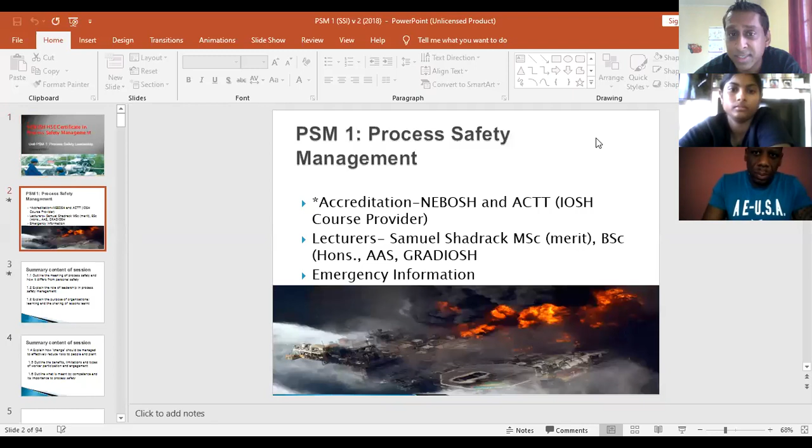Right? So the first lesson, and I'll go very fast with this. Let me just get this on the slideshow. So the first lesson basically had a lot of small topics. Not too sure what that is. Right, so a lot of small topics on the first lesson. Small meaning they were just a couple of slides long.

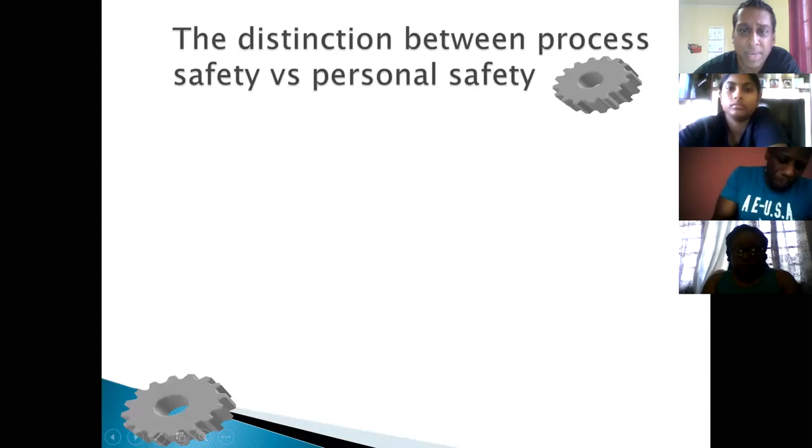And I think the first piece would have been the main distinction between process safety and normal safety. Just to remind you, the main thing was that process safety more pertains to the industries, like the chemical industry, and process safety has to do with those events that don't happen all the time. It's not like normal safety. Normal safety, every day you go to work, you can find something that can trip you, something that can cause slips, trips and falls, or there may be housekeeping issues.

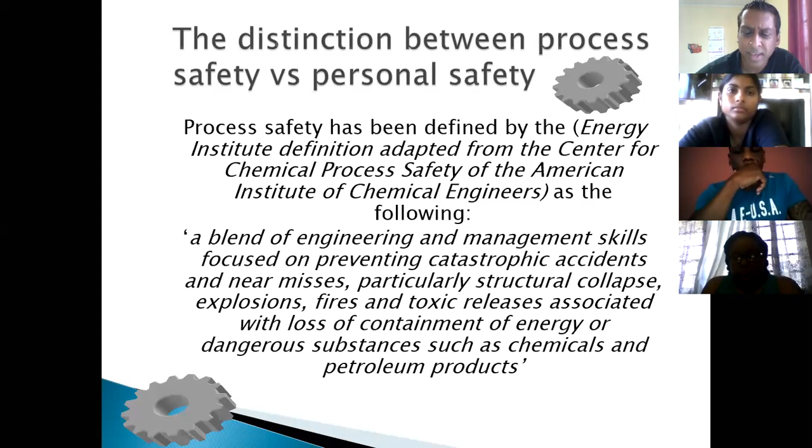But with process safety, the hazards are really stuff that don't happen all the time. They say it is low frequency. But when it does happen, it tends to be more than somebody slipping, tripping and falling. In fact, the outcome is oftentimes death and destruction on a multiple scale. So process safety, and of course we had exam questions on these, deals with stuff that doesn't happen all the time, but when it does, the severity is quite high. And of course, I think we all would have seen the explosion in Beirut.

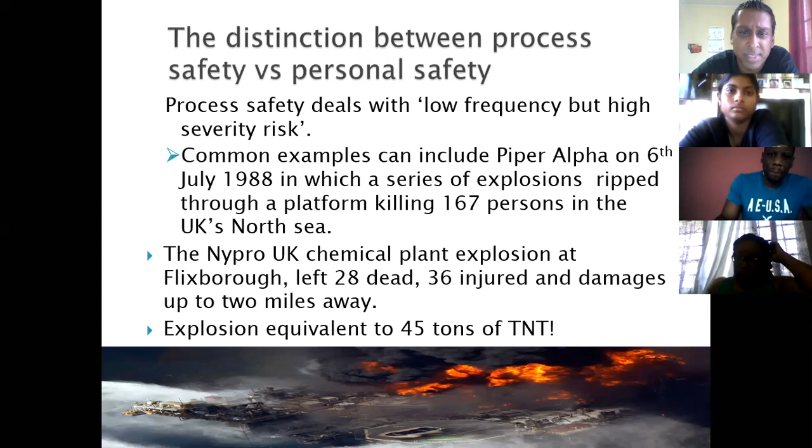Now I do have the video. I don't want to show a video at the start of the class; I prefer to do some teaching. So if I am finished and I have a couple minutes extra, it's about a 7-minute video from CNN, I'll give you a look at it. So that's the idea of process safety, stuff that doesn't happen all the time, but when it does, it tends to be quite disastrous. And this was a question coming out of that anyway.

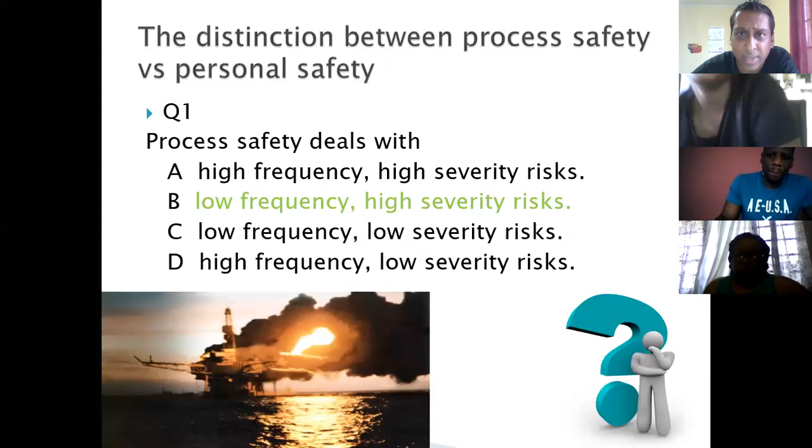You should have maybe pen and paper nearby. Let me see if someone is messaging. Sometimes people don't get the link. If anybody has trouble, you could probably just liaise with Janet behind the scenes. Yeah, like I was saying, if you have pen and paper nearby, we are recording this, and hopefully you have your handout.

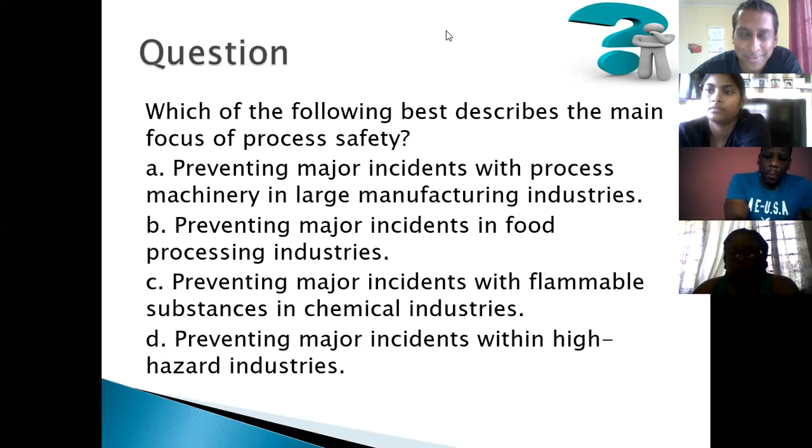And that's the fun thing about multiple choice. For those who forgot, all the answers are looking there at you. Again, if you have that pen and paper nearby, just remember it is 40 questions, and if you get 24 correct, you pass, right? So you have a good amount of questions you can safely get wrong and still be awarded this certificate. So 24 out of the 40 will give you 60%.

And of course, I have not had anybody who scored 60 in this. People have been in the 90s, 80s, sometimes you find the odd 70s, because it is that easy of an exam. Anyway, I'm not gonna go through all of the subheadings, I can show you them. So we had process safety leadership. That basically says the same thing for all safety courses, that leadership starts at the top, right? I'm going to leave that there.

Then we had the management system. This was one, process safety leadership. Does anybody remember where leadership falls in the management cycle? The management cycle goes over the principle known as the Deming cycle, which is the plan, do, check, act model. And this is multiple choice, of course. So where does the leadership fall? Does it fall within plan, do, check, act, or do you remember where we had said that it will go?

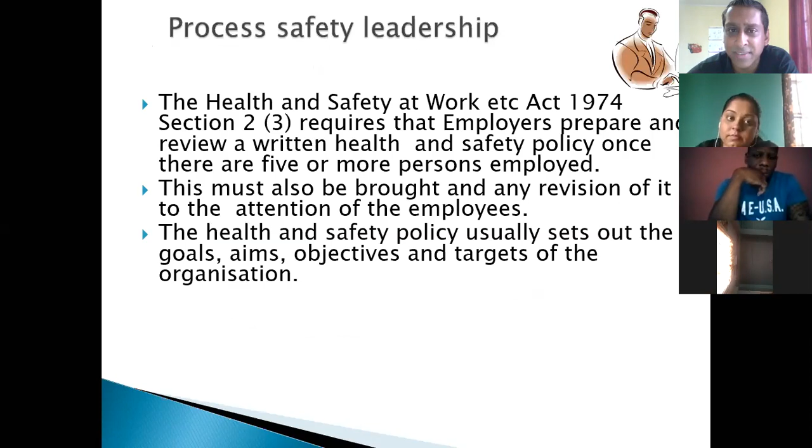In fact, I'll show you the question now. Where would reviewing performance fall? And by the way, it's only one they'll ask, right? They have asked plan before, they have asked do, they have asked leadership before. So anything could come, right? I think I have some questions hidden up somewhere here. So remember, the aim of all of this is that leadership is central to process safety management, as it is, I think, to all safety management.

So you have one here. In fact, I have another one. Let's do this one, right? I remember doing that one in class, so I might as well do a different one. So the key elements of a process safety management system follow the plan, do, check, act model. Policy aligns itself with which part of the model? It couldn't get easier because that is like the first one. Policy is plan, right? And like I said, I am giving some hints for the exam.

What I mean is hints, like strategies. I was saying that I would combine all these strategies at the end of today's class and tell you how we can go about getting the exam done.

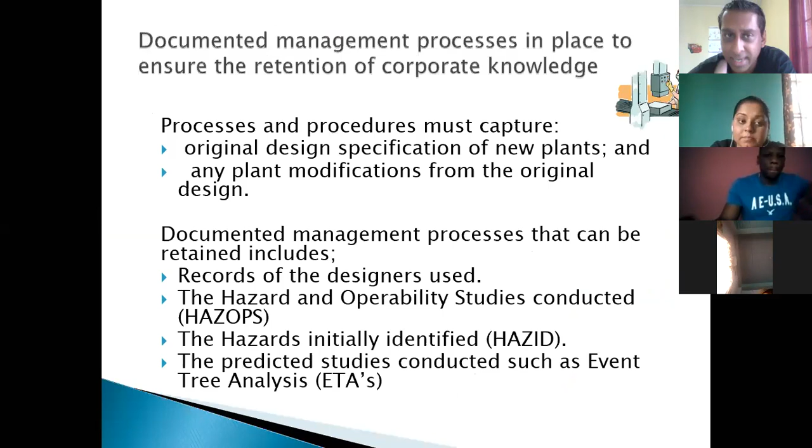Reasons for accident investigation: it is the requirement of the law. And like I said, there's a lot of small topics here, which I am going to try to end off within a couple of minutes. You do have things like the need for sharing lessons learned - we have them written down here. So we have here things like the use of benchmarking, which is going to come up in a bit.

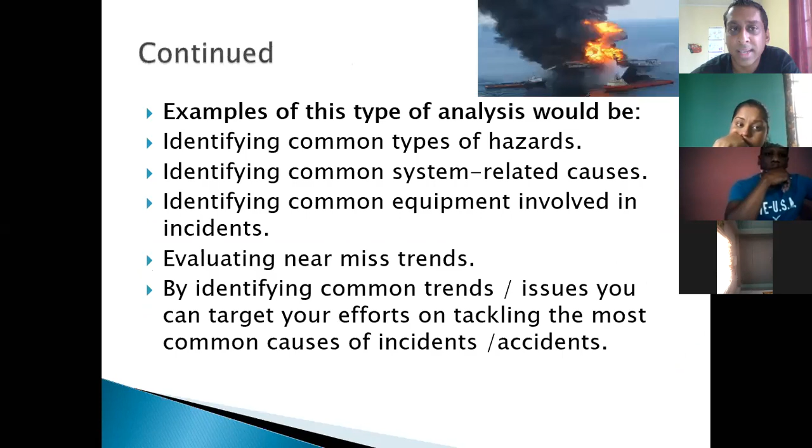Benchmarking is just comparing your company's standard against another standard, or a better standard, to see where gaps might exist in your company. It's fun reading, meaning it's not difficult on the mind or the brain at all. The purpose of benchmarking is to get best practices across different organizations.

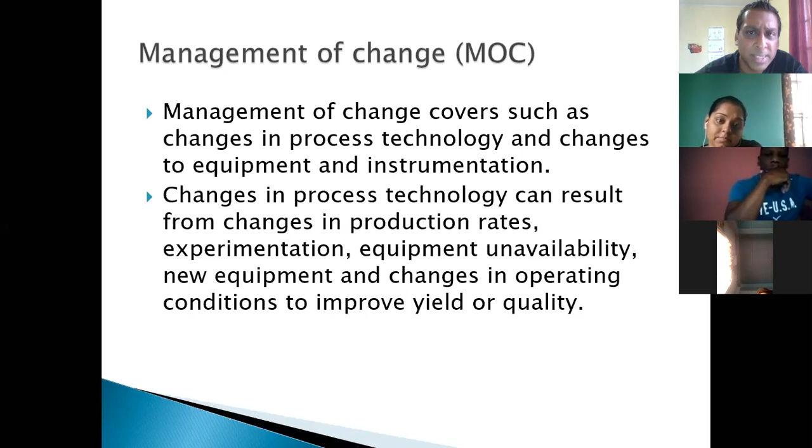You have management of change, which is a form you fill out whenever you have any change that is not a normal change - not one that occurs at the end of the year, or one required by the manufacturer. It includes all modifications to equipment, changing a procedure before it was meant to be changed, a change of raw materials, or any processing conditions other than a typical replacement in kind. For any of those, you need to do a management of change.

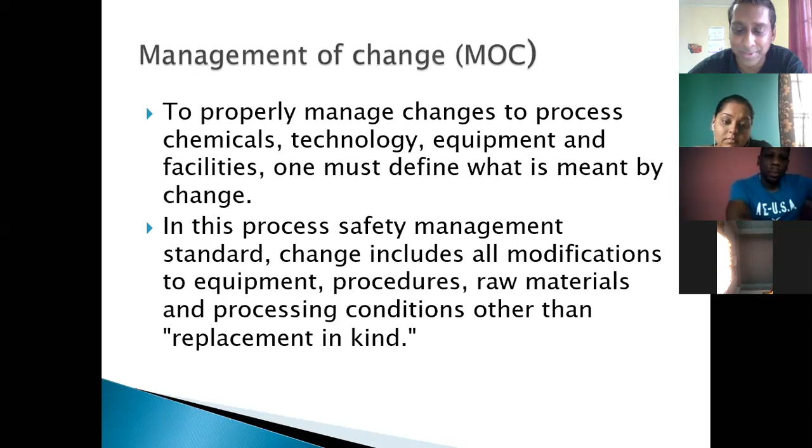That is a form to fill out, and the form would then be incorporated with the change. You can take a read of these. It comes down to a management of change form, and the person responsible for the change must be documented on the form.

We had worker engagement, which I think was self-explanatory - you need to engage workers in decision making, and all of the benefits for that. I don't think this was complicated in any way. I think that's the same exam question there.

The use of contractors - the process of hiring contractors - that is also going to be in today's lesson a bit.

And the end of this would have been something called competence - how do you train operators, and even those of us in process safety, how do we train them and how do we identify a training need? The answer was something called a training needs analysis. In this course, they referred to it as a process safety competence management system - PSCMS.

For those of us not in process safety, all that is, is a training needs analysis. Let me show you the picture of what it looks like. A training needs analysis is like every company does one - they would have your name, your position, and there's one in your book too. They will have the person's name, position, what skills you came in with, and what skills they want you to gain, maybe during the course of a year.

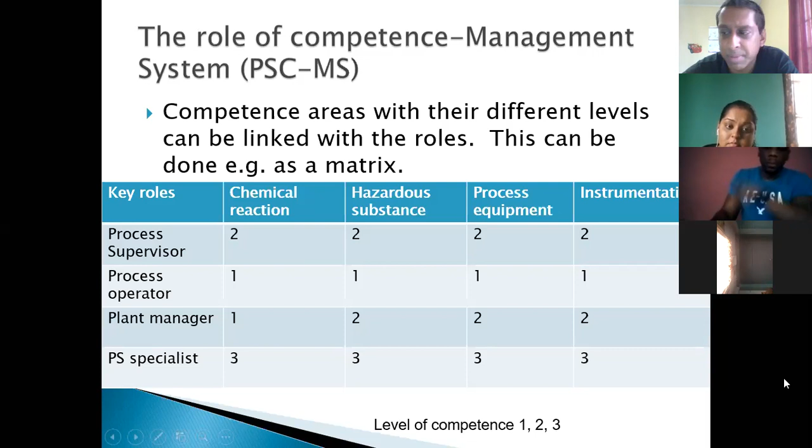Here we have level of competence, and this is just the idea of a training matrix. Remember, this is a multiple choice exam, so you don't have to explain or draw out a matrix yourself. There's a question in this, right here: workers competently perform a routine task on a process line, and a new process will shortly be introduced.

That requires many different skill sets. What is the best way to help with planning to fill the skills gap? And of course, we never talked about anything like psychometric testing here. The only thing we mentioned in this course is something called a training needs analysis, or they might use the heading PSCMS - process safety competence management system. But you get the idea that it's some sort of mapping of the person's skill with what they have and what they have to do.

And that was the end of this session. If Janet is on, I guess you could probably try to liaise with Giovanni. He seems to be trying to contact us and log in. I've clicked him about four times now, but he's not getting in. If we could try to liaise with him on this, I'm not too sure if he's getting in at all. Connecting with him though - say it again? I said connecting with him. I just saw the audio was connecting. It's just connecting. I'm not too sure what's happening with him in the background there.

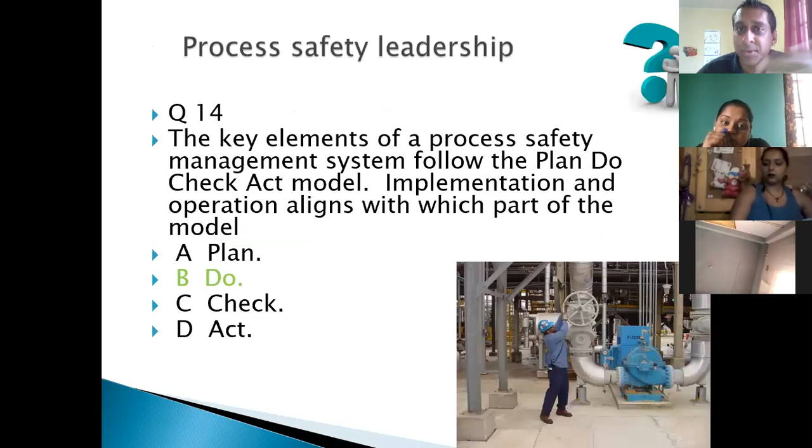So I think that is noteworthy of being learned for the exam. It's a fun multiple choice question, you know: how is a MAPP policy... I guess even if they don't say MAPP, they may have just said a process safety policy. How is that different from an everyday policy? You should figure the first part.

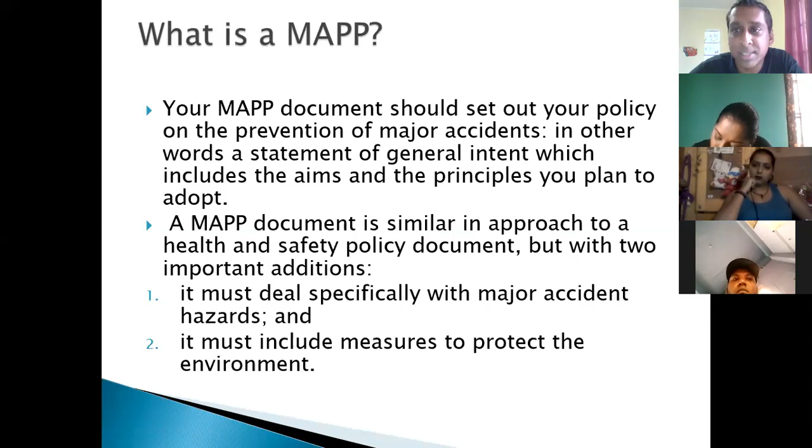The first part must include, you know, that's what we're talking about for this whole class, major accidents. The second piece though is that it must be able to protect the environment as well, right?

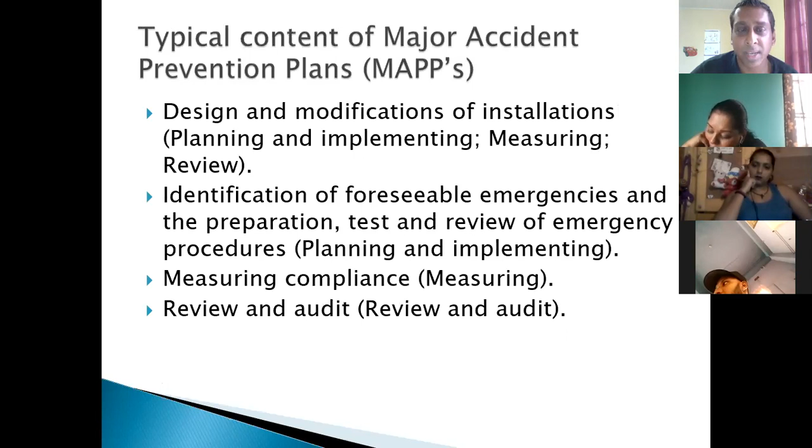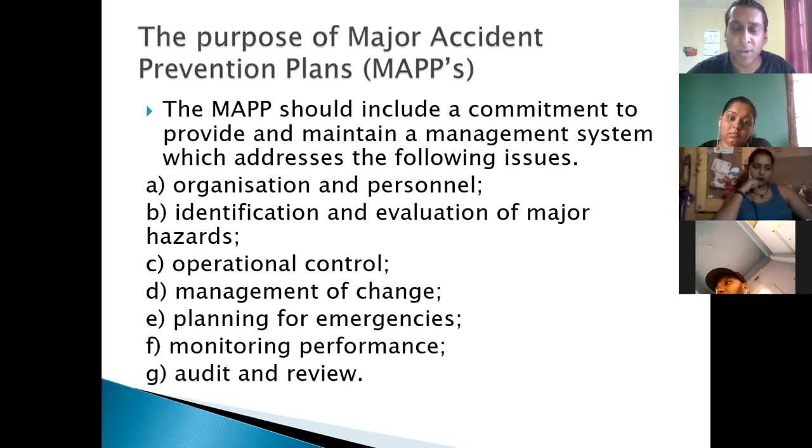So we did that, and I did that extensively, which I'm not going to do over. I listed out for you what could be, well, what are all the ideas of a MAPP policy. In case you're not seeing all of this, for that company, they needed to address all the elements then of Plan, Do, Check, Act. They needed to say what is their policy to prevent a major accident.

They needed to say how would they implement the policy, how would they measure it, for example, like probably doing a drill, training, etc. What lessons would they learn if they do those drills and they do those audits on their system, and how would they take it a bit further, right?

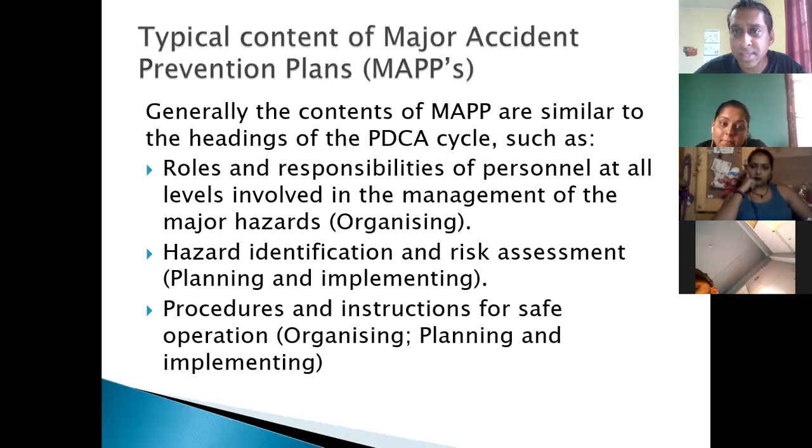And so in the slides, remember I told you the long story that we wrote this slide before NEBOSH had a textbook. So if you take a look at the slide, it's more detailed than your textbook. I think when they go to put a book together, they try to keep it down to a certain level anyway.

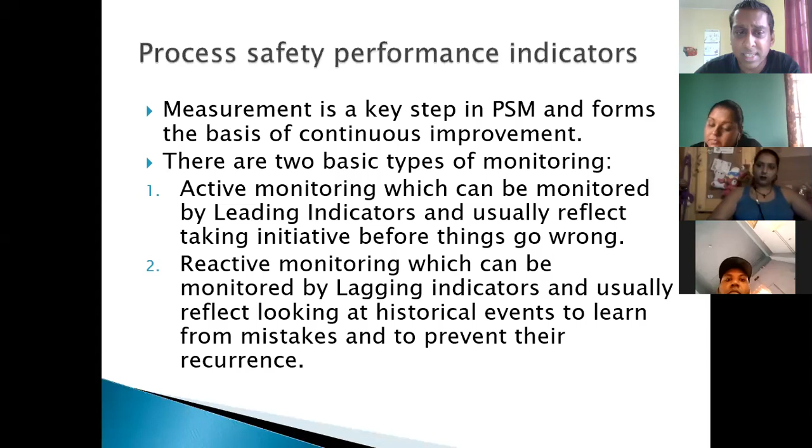But I've been very explicit here when I went on to tell you what would be some of the things they want to put in the policy. Like they want to put some active monitoring aims, for those who know about performance indicators, and then some reactive aims as well. I'll address the reactive in a bit.

But the active aims you want to put in are things like, you know, have they captured any management of change on the form? Did they have anybody trained? And of course, for those who know the heading here, leading indicators mean that these are proactive things the company wants to measure. For example, mechanical integrity, asset management, right?

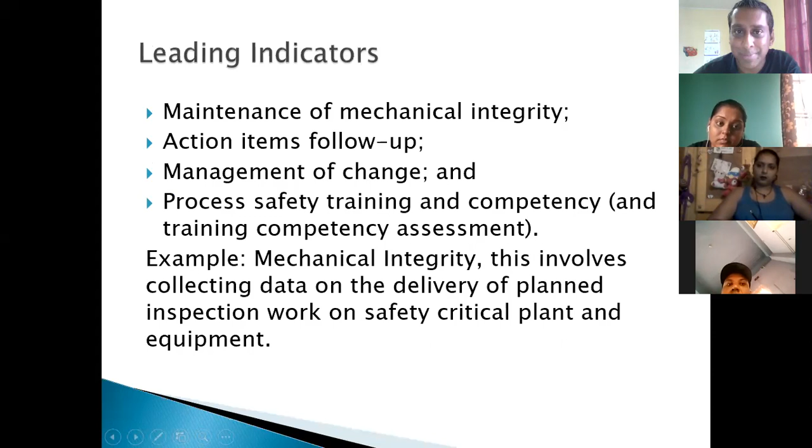And then I think the big no-no is the reactive indicators. The reactive indicators are the lagging indicators. Remember, you can't wait for an accident like normal safety now. You can't wait for like an incident or an accident to say that you want to learn from that. So the reactive indicators are a little bit tricky.

The reactive indicators are that you do have to take anything that falls beyond a specification for process safety, you have to take that then as your potential reactive indicator. You can't wait then, right?

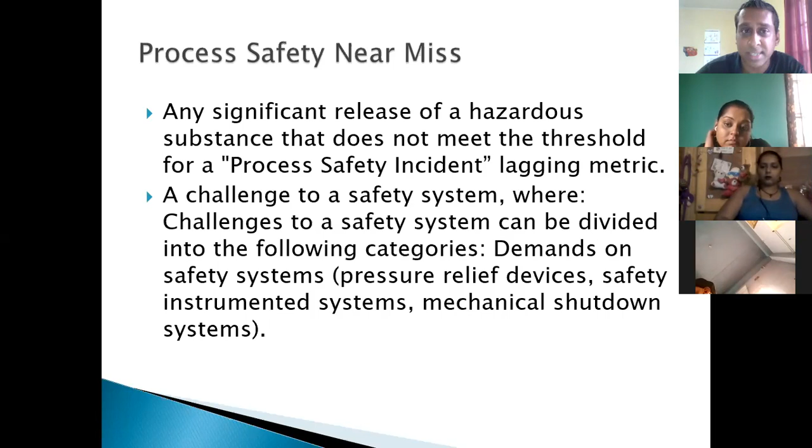If something like a valve didn't work how it's supposed to work, if a particular reading on that valve or the gauge was supposed to be maybe 100 parts per million and it went to 95 parts per million, even though it didn't result in anything, you have to take those things as the reactive indicators because you cannot wait for a full-fledged accident to learn from it.

So I have some here, some of the process safety near misses that they can put in the major accident prevention policy. So they'll have to say things like, we are committed to ensuring the highest degree of inspection and testing for parts and equipment, right?

We are committed to preventing things like process deviation or excursion from recognized standards. So you have to be a little bit more refined with your reactive indicators of process safety, as I said, a result of it being brought to life then would result in a full-fledged accident.

So things like the failure of a valve to open or the failure of a valve to close at a specific time or in the required time, all of those are the things you have to take into consideration. So these are what these slides have in it. I went on to list them. All of them, they are here.

When we taught this in class, I told you all don't learn, I mean, you can learn one or two, but the thing is you just have to know that the process safety reactive indicators is stuff that falls, you know, like below specifications. If you see it for an exam question, not that you have to remember what I put here, but you have to remember that something was outside of a design parameter, or something failed.

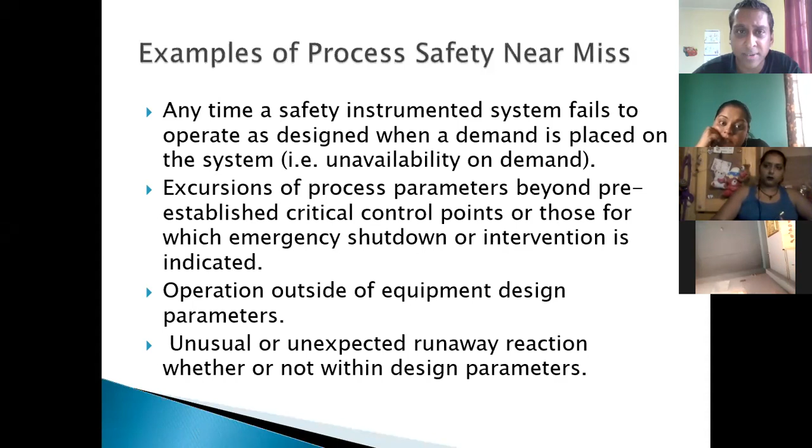I think I'm remembering something for the exam. I think somewhere in your book, bear with me because I have to look for it, this was a question, right? And they had asked which was a reactive and which was a proactive indicator. I have my book here, I'm trying to get the page. And I think one of the things they had was the words "the number of," right? So, trying to find the page and talk at the same time, I guess in order for you to say something was reactive, you had to say like a high number of interlock test failures, right?

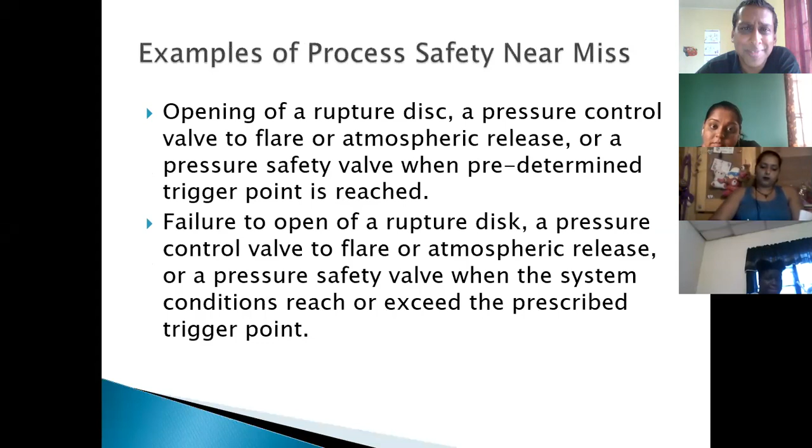So here we have a bit on auditing. How would you maintain process safety standards? As you should know, those reactive and proactive indicators we just finished are called in the company KPIs, key performance indicators. In fact, the word indicator would have been said in this as well, right? I'm trying to go back and show you, but I know you'll find it. The word indicator would have been said there all the time, lagging indicators, right?

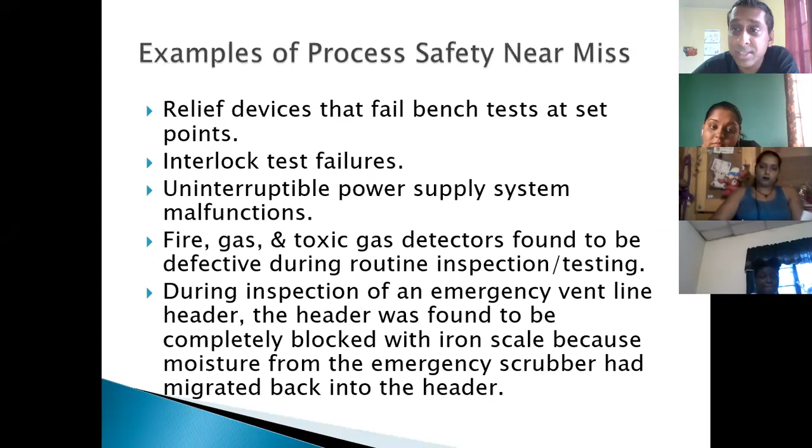Those of us in safety know that every month we have to compile those statistics, and those statistics are normally shown on a spreadsheet, like how many hours you would have completed in training. And in process safety, how many MOCs would have been done, how many safe shift handovers would have been done, and the reactive indicators: was there any process that went beyond its parameter, was any valve found to be slightly deviating from how it's supposed to function. Those things are captured on those spreadsheets. Some companies require that you put it on a graph.

And then those things are subjected to audit. So if something was captured on those key performance indicators, yes, the managers could take a look at it, but how do we ensure on a bigger scale that those things are done? The answer would, of course, be things like audits, compliance audits, etc. All right, so I'm going to go a little bit fast and then slow down a bit, right?

So from here we had done the risk management techniques in process safety management. I'll go a little fast here because we did cover what a normal risk assessment is all about, the 5 steps. If you are in safety already, you should know this. If you don't know it, I don't think you have to learn it for this exam, but you may want to learn it for everyday life because this is what safety people do for a living.

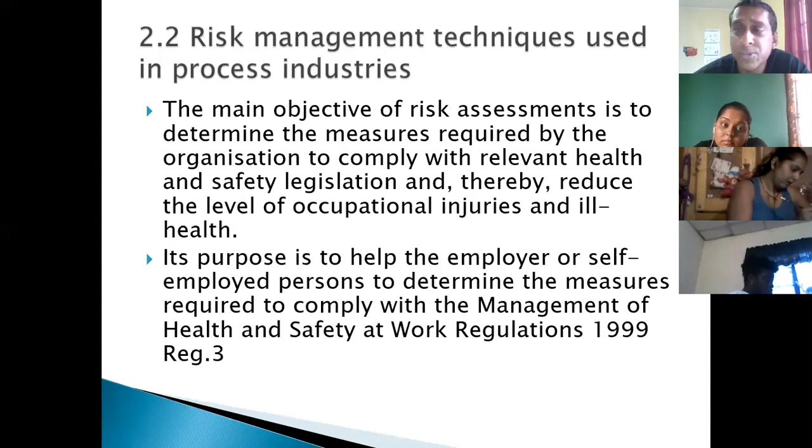You find it here, regulations, straight down to the bottom here. There's a UK law there, the Management of Health and Safety at Work Regulations 1999. You don't have to learn it by heart. The point is, doing a risk assessment is a part of the law. And for all of us in Trinidad here, and wherever this video may end up on YouTube, risk assessments are part of any law in any country. Once your country has a law, or if it doesn't have a law and you follow the ILO standards, it is the same thing. In Trinidad and Tobago, it's in Section 25 of the local OSHA, you'll find it, to do a risk assessment.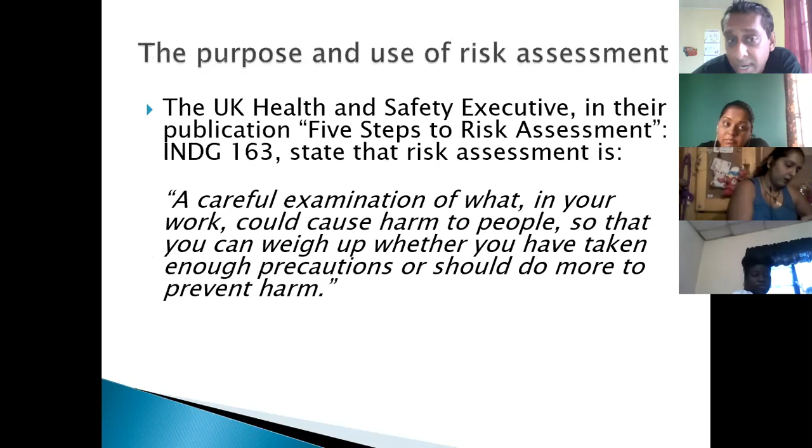Anyway, the point of that, I was saying that you have to know to do it, and the moral of the story is that what they were trying to suggest here was that because process safety deals with high severity occurrences, I'm just trying to boil this down for you, a normal risk assessment is advised, but you need to do it in more depth, right? We need to do a more detailed risk assessment other than just the 5 steps on a spreadsheet or on a table. And the 5 steps is quite detailed. Those who know this know it is quite detailed.

But in the process industry and the oil and gas industry, they are suggesting here that we do a more advanced technique of risk assessment, and they had a bunch on your syllabus. I think we just had 1 done. If you think I did more than 1, I can't remember doing more than 1. So we're going to review 1 now, and I'll probably get the rest done. And that will probably be it for the majority of today's class anyway.

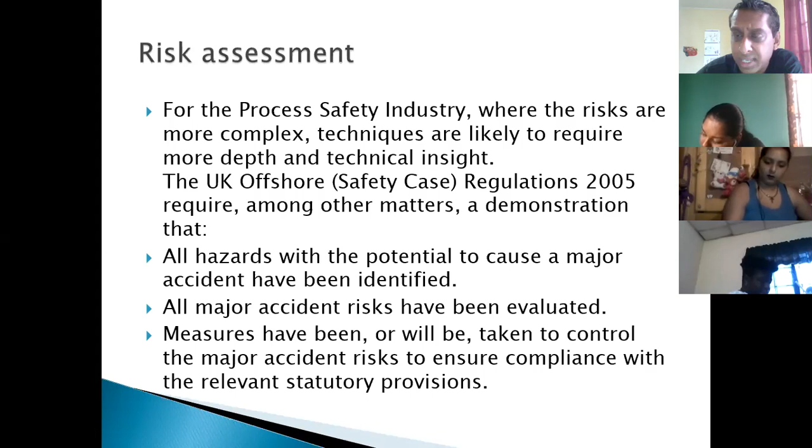I think last class we did 3. We did, really? HAZOP, right. Bowtie, and event tree. Oh, well, we did the main ones, so better yet, right? So good for me. I'll just be able to review them with you because those are the major ones. I think that's why I may have hinted to those.

The failure mode effect analysis, FMEA, is just like a HAZOP, and if I'm missing out one, it would only be something called a HAZID. Those were the 5, right? And those are the easier ones. So I may have done that. So good, so that you were actually there, because I was worried. That is the hardest part of this course, to understand those HAZOPs anyway, right?

Anyway, types of risk assessment, we were saying that there were about 3 types of them. You had qualitative, in which the risk is calculated by just saying words, like high, medium, and low. Now, if we did HAZOPs already, you should remember that a HAZOP is actually also qualitative. However, it's more refined in that it didn't just say high, medium, or low, but, if you all can remember, they went on to use guide words, right?

A guide word would have been a word like 'more' or 'less.' If they were looking at pressure, more would have meant an increase in pressure, and less would mean a decrease in pressure. The point of this story is that they use words - more is a word, less is a word, just like high, medium, and low.

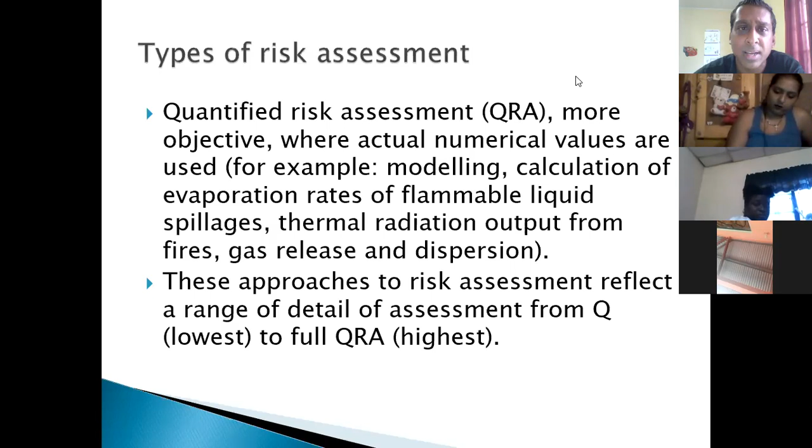If they call it by name, as Melanie mentioned before, and you remember the names - which of the following is best to use in the process industry: a HAZOP, a HAZID, FMEA - all of these, if you look at the heading at top, are qualitative. So when studying for this exam, this is the fun thing about multiple choice - you don't have to kill yourself learning the slides by heart. You just have to understand what the slide is saying.

I have seen before, in 2017, just one sitting - the first ever process exam held outside of the UK was right here at this school, Trinidad and Tobago. Right here in Trinidad was the first process exam they had besides in the UK, for one year it ran in the UK. In that one sitting, and only in that one sitting, they asked students what is the meaning of the term HAZOP. Remember, it's multiple choice, so the words were right there - hazard and operability studies. It never came back. I'm just trying to tell you, in case you want to know how much to learn, that question never repeated.

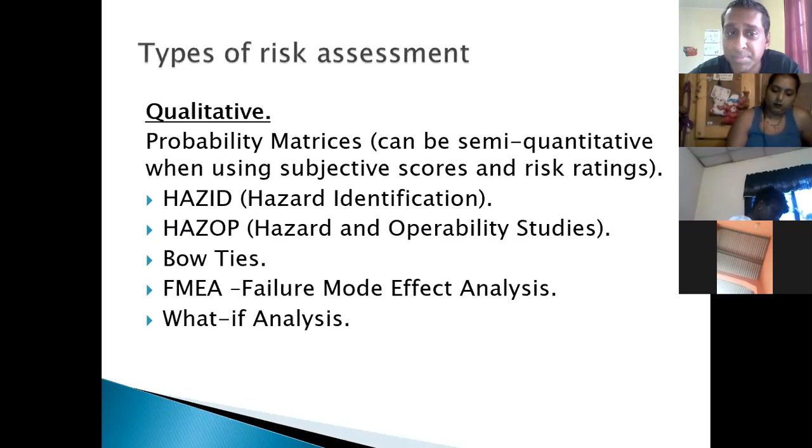Anyway, I was saying, if they gave you the same question - which of the following techniques would be best suited to the process safety industry - and you remember, all of these are qualitative: HAZIDs, HAZOPs, Bowtie, FMEA, what-if analysis. But you remember the ETA and the FTA. Now, we didn't cover the FTA, but I don't think it's in this course - the FTA is done at the diploma level.

But remember these two, and the one they brought before is ETA. Remember this one has more numbers, it's more accurate. If you look at it, it's more objective, right? Then this will be the answer you want for doing a very precise risk assessment.

At the end of the day, multiple choice may be tricky, but the answers are right there looking at you once you have a basic idea of what you're looking at.

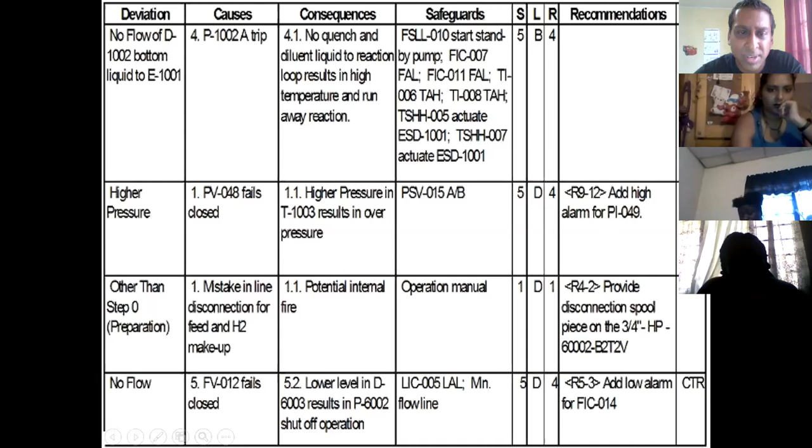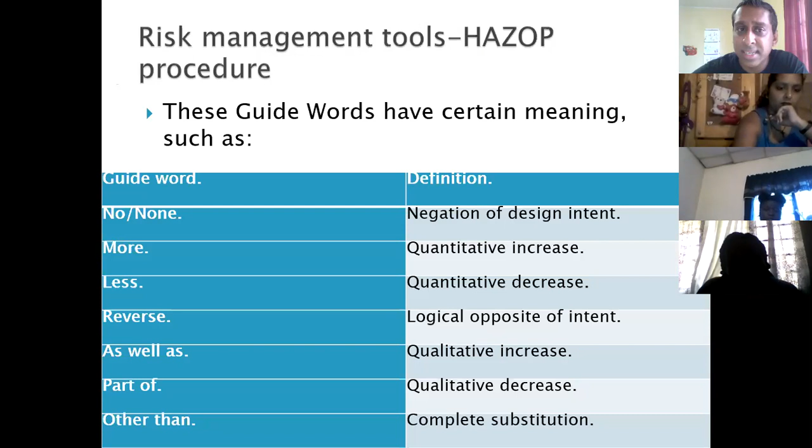Again, keep in mind you are doing a multiple choice exam. So how could they bring this? It's not as if they're asking you to draw a table and do one. They may simply say, which of the following techniques uses guide words? And the answer will be HAZOP. Which of the following techniques uses a qualitative means of assessing risk? It's a HAZOP. The key thing about a HAZOP though is that it is predictive, meaning it could be used in the design stage of a plant. The design stage means the accident hasn't happened as yet, so it is best used at the design stage or whenever you have a plant modification.

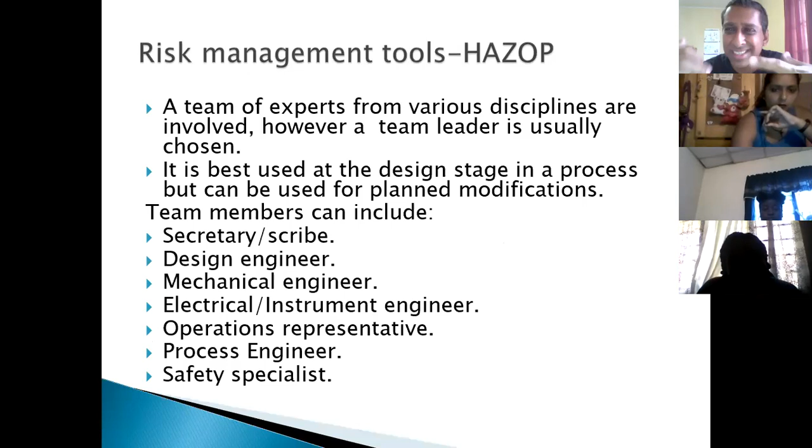So you think about, well, if you change this valve, what would happen if the pressure increases on the plant? So this is the idea behind it. And as simple as that, I believe, could be your exam questions.

But this one, the other one we did not do, HAZID. Again, like I said, the reason for this is that this is even simpler than a HAZOP. So let me just do the explanation first, and then I'll just read a couple of lines. You'll see it is the same thing, right?

So in a HAZID, a HAZID is used at the design stage, just like a HAZOP. But what a HAZID is, right? It is like a list of the hazards. The company, safety and process manager, etc., they would have gone through already and just walked through the whole plant or a part of the plant, and they would have already gotten the hazards and put it on a sheet.

What a HAZID is, is that you just have to look at that sheet, and as you do your inspection, you just tick off the hazards that they have already thought about. So you'll see that each area of the installation is considered against a checklist of hazards. So as you go, there would have been these ready-made sheets. It's not as if you have to go and calculate anything.

You would go through, and if you're looking at a system of valves, you would see, are the valves of good integrity? Yes, no, replace. If you're looking at a gauge, is the gauge working properly? Yes, no, replace. Is the needle within the safe operating limit? Yes, no, replace. So that is what a HAZID is.

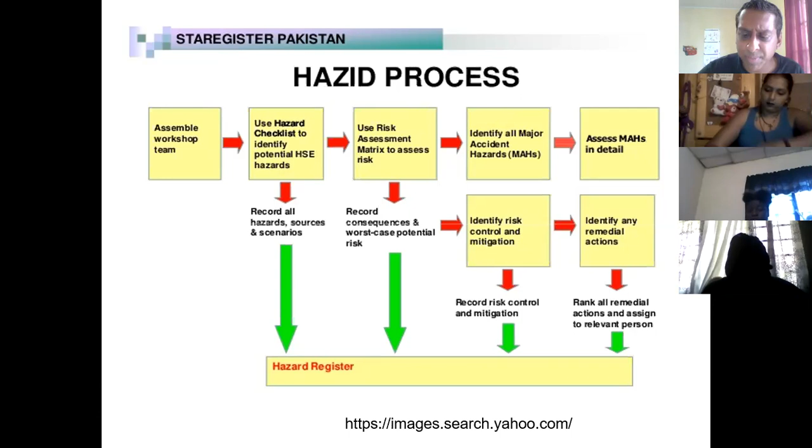A comparison between a HAZID and a HAZOP is done on this slide very well. None of these has ever come for exam, but we could run through them as we did not do this before. So let's go with the one we know, which is the HAZOP.

A HAZOP is systematic. It's done at the design stage, right? Those are the things we know. A HAZOP uses guide words like more, less, no, and reverse, whatever. We all know that. Does not typically assess risk.

So I don't know if you realize that. If you want, I can go back and show you, right? A HAZOP did not assess the risk, right? If you go back to this HAZOP sheet, right? Now, when I put risk here, it is me. I am the one that put in risk here. But a typical HAZOP does not assess the risk.

If we go back, a HAZOP follows through these words here. You have the guide word, the G is guide word. The D is deviation. If you check it back on the table, you would see it. Oh, by the way, you have it in your book.

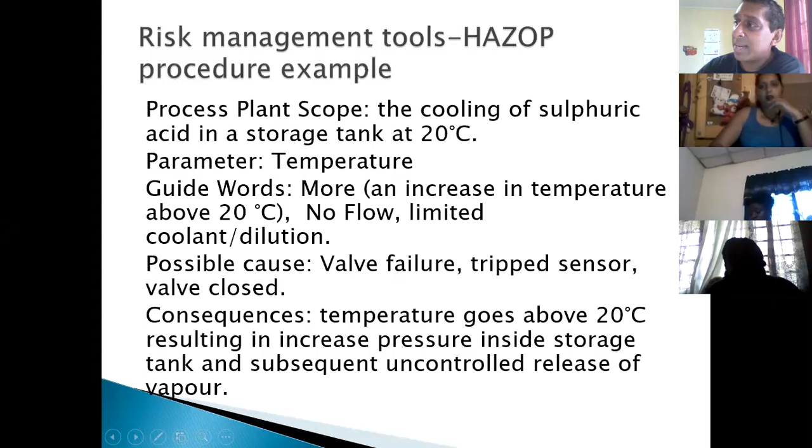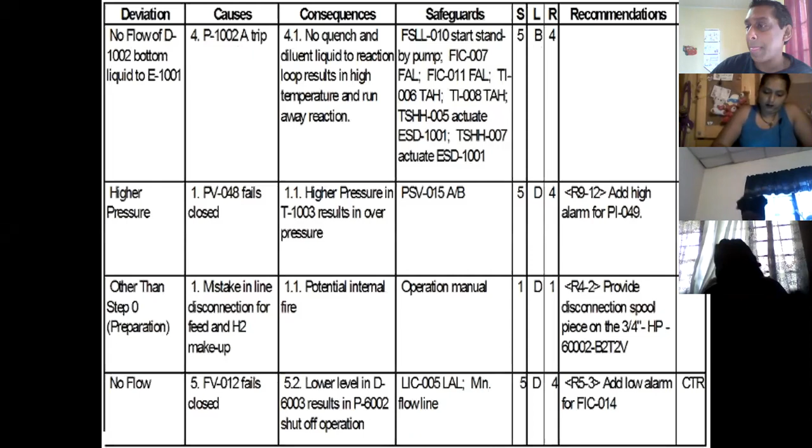Instead of going back and forth, you could just open your book and see a typical HAZOP. That one I put there, again, that is me being, I guess, technical. Page 38 has a picture of the HAZOP as covered in this course.

Now when I do these for companies, I tend to put in the risk. But like I said, that is me, that is not the theory then. I put in the risk because for those of us in safety, I fail to see the point in putting the hazard and not putting the risk.

But if you look at your book, page 38, a typical HAZOP follows the heading of guide words. That's the G. D is deviation. P is possible cause. C is consequences. And A is action.

So in reality, excepting some of what I do for companies, a HAZOP does not typically assess the risk. I have kind of done a one-up on the HAZOP to make it assess the risk in my chart there. It requires process and instrumentation diagrams, yes, because you want to figure out what would happen to the temperature and the pressure.

A HAZID, what we just covered today, is systematic, done by a team, but a big difference is that it does not use guide words, it uses a checklist. With a HAZID, if you look at page 38 and 39, at the bottom of page 39 you would see that yes, they did consider risk. You see consequences by frequency. So it assesses risk associated with hazards identified, and it doesn't really need process and instrumentation diagrams, P&IDs as they call them.

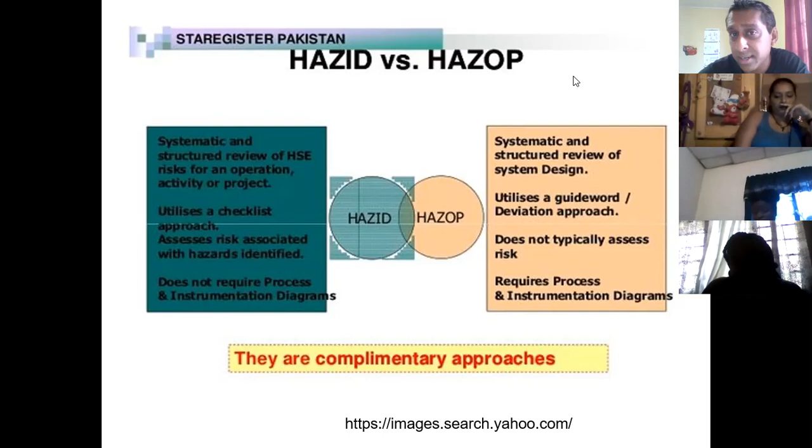Not that I have seen this, but it's good that we use the book there, page 38, page 39, so you can clearly see what the diagram had in it. I think we may have overdone this because there are no such comparison questions as yet.

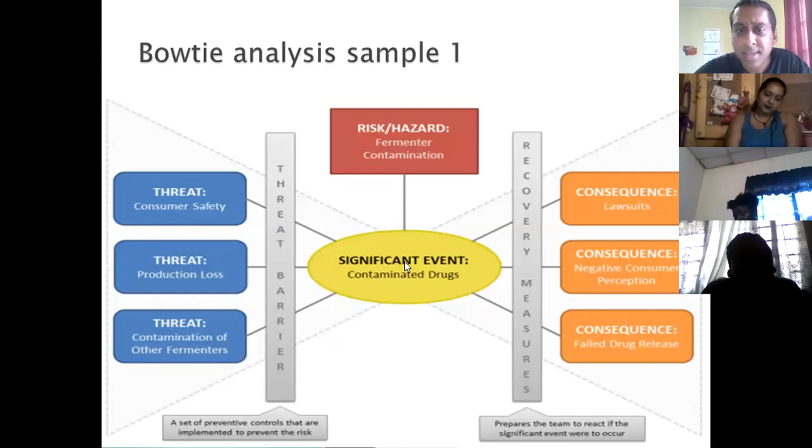The Bowtie analysis, we also covered this, so I just want to show you it and discuss it. Our Bowtie analysis starts off with the event, right, you start off with what could go wrong. This may be more of a process example, right.

So you have the influx of hydrocarbons, and with a Bowtie analysis, two things are shown. What is shown is the cause, some people refer to that as the threats, and what is also shown is the consequences.

I want to explain this since five months ago may have been some time. What they say about a Bowtie analysis is that it actually captures the proactive and reactive sides of what could happen here. On the left-hand side, what is covered here is what could be seen as proactive. And if you wonder, are they talking about shallow gas and lost circulation? Yes, they are. But these things here, anybody remember what the purpose of these things were?

Anybody? It's right on there as well, so I kind of gave it away. Anyone have an idea what these things were, these kind of blank spaces in between these lines? Barriers. Very good, these were barriers.

So why they say it's proactive is, I don't know if you all know these terms, so I'll try to use one that everybody knows. A kick is something in the oil field industry. So like if you say lost circulation or lost flow, when they examine predictively what is the cause, they'll actually put a barrier to it. The barrier means they were trying to stop that loss of flow. The thing is they can have more than one barrier, the more barriers they put, the more chances that they will prevent this from happening. So this is proactive because we thought about it happening and tried to prevent it if it did happen. On the right-hand side, what they do is consider what are the consequences.

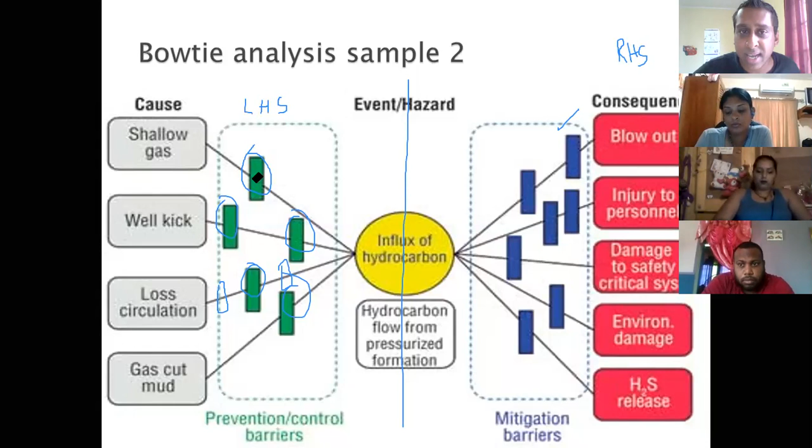And of course, having a look at the diagram, you would realize why they call it a bow tie. If you were able to just draw some lines here, it looks like a gentleman's bow tie, hence the name bow tie analysis. I think I have a past paper here, I'm not sure, let me try to change this back into the cursor to get this to move.

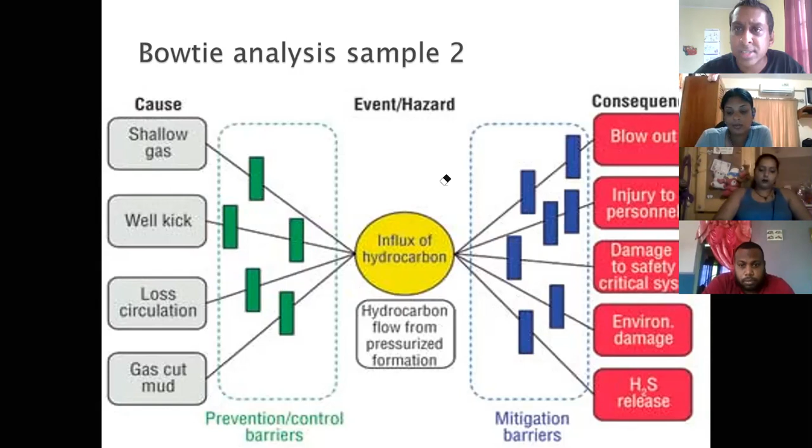If not, there was a bow tie question, so I guess we would cover it when we start on those past papers. I was looking there for it, but I'm not seeing it. Anyway, so let's just do the other technique here. By the way, that was the question - which technique would examine both proactive and reactive indicators - and the answer was the bow tie analysis.

But we also covered this already, the ETA - this was five months ago. To summarize, the ETA uses probabilities and binary logic. It is the most accurate method out there. However, the downside to an ETA is that although it can be used in the design stage, it is more accurately done after an accident. So that's the downside - to get your precise actual figures, an accident has to happen.

I think when we were in class, I mentioned to you all, this is like the black box of the plane. It is a plane that has met with some sort of undesired event and there's an accident. When they retrieve the black box, they can capture the data, like the precise time at which the instruments fail. And that's how we can get figures like 0.8611 and all of those fancy numbers. So that's the downside of it.

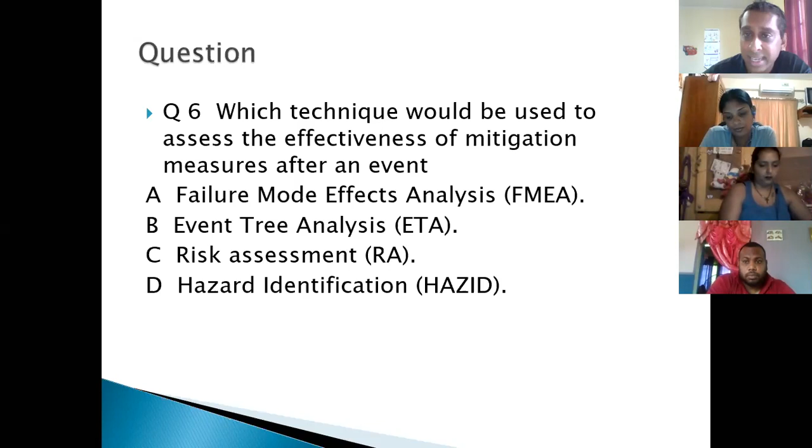Anyway, this is what it looks like. And again, this is more for the folks who are doing the degree. You would not be required to construct an ETA. An ETA, they say, looks like a family tree. You'll find it at the bottom here, but it's a sideways family tree.

It doesn't start at the top then, if I can grab back my marker, right? But I wouldn't grab the marker because I'd have to go back and grab the cursor to move the slide. So let us get it back to that slide one time.

So it looks like a sideways family tree, and you start off with the event, like if it's a fire, gas release, explosion. You start off with what the event is. What the ETA considers is the mitigation measures to prevent that. I'll say that again. An ETA examines the control measures to prevent what you say is going to happen. So if you say a fire is going to happen, you have to study the control measures you have in place. So the control measure is a sprinkler system, somebody calling the fire department. Maybe you have a deluge system, water or powder.

They just have two branches there, 1, 2, right? So depending on how many controls you have in place, you can draw another branch up here. And the top part of the chart, when you say success, they consider if these things work. So if there's a fire, they could have put in smoke detector. I could probably put 2 more branches in, but I'll stick to what they have. So if you have a fire and the sprinkler system works, that's what they mean by success. The sprinkler system works, somebody calls the fire department, then everything's supposed to be okay.

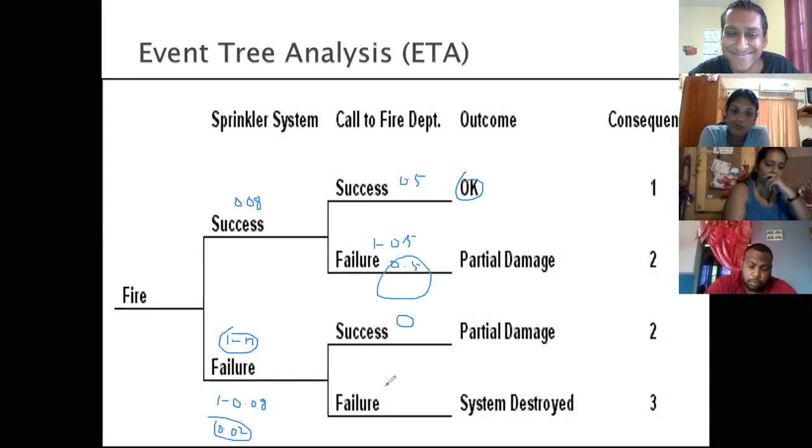Right. So you'll be here in the rain upstairs, right? Yes. Right, so I am broadcasting from upstairs, and so normally if rain falls, you'll be hearing quite a lot on the ceiling, right? So hopefully you could hear me okay. I may just increase my pitch a bit so you can hear me quite okay. All right.

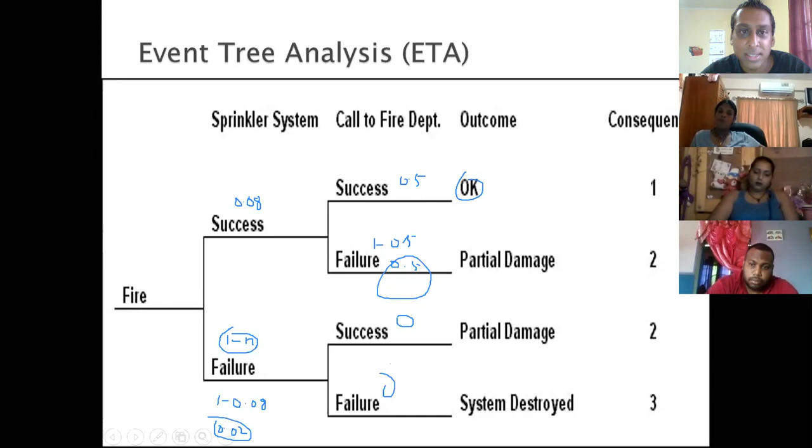Right. So that would have been the ETA. As I mentioned, you can go back and see that this thing had calculations in it. You can find all of that here, binary logic, forward logic, right? So I'll clean that screen there.

Right? So it is raining in San Fernando. It was just raining here in Arima, but like it reached down by you. Yeah. Right. We hearing you though. Okay, good. As I worried about that, I can probably close this window. All right. It may help us to an extent.

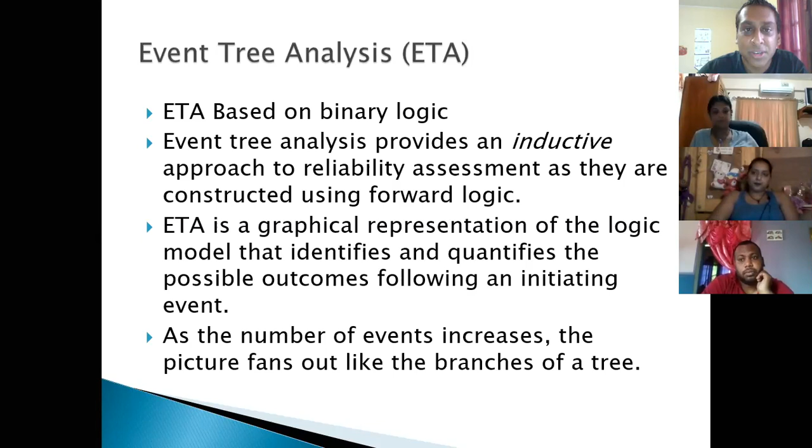All right, so we did that. This one, right, the failure mode effect analysis. Did this one too. I guess the safest thing is to read, right? So I'll read, and I guess you all could follow. So failure mode effect analysis evaluates the way equipment can fail and the effect these failures can have. In an FMEA, each individual failure is considered as an independent occurrence with no relation to other failures in the system.

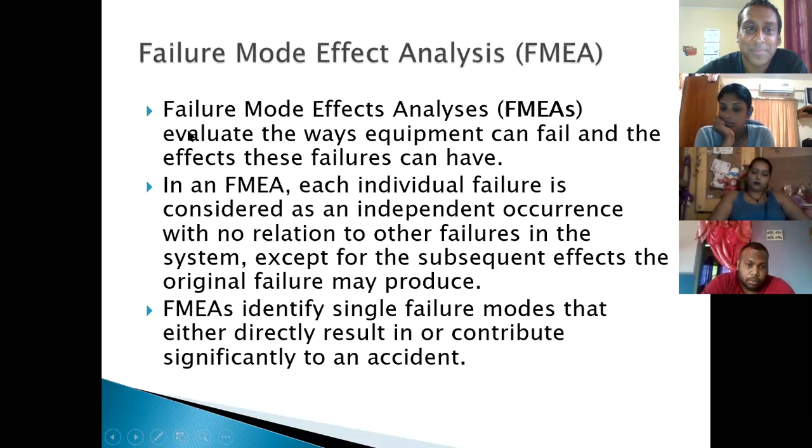So I'll have to lower my pitch now. Except for the subsequent effect the original failure may produce. FMEA identifies single failure modes that either directly result in or contribute significantly to an accident. FMEAs are conducted to improve the safety of equipment by identifying single component, equipment, and system failure modes, determining the potential effects on the equipment, system, or plant associated with each individual failure, generating recommendations for increasing reliability of the component, equipment, and/or system.

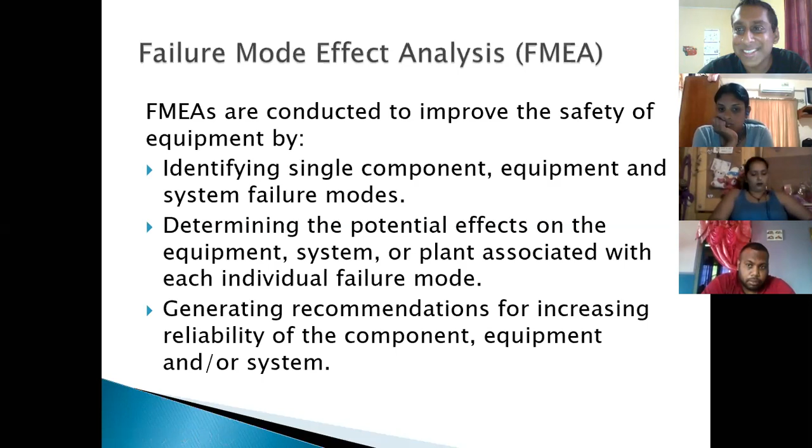But if you can hear me, the main thing with an FMEA, let me just grab the marker so you can still try to follow, right? Is that what they do, they take a whole system, and they break the system up into components. They will look at how the component could fail, and they will look at that failure on the entire system, right? So how the failure could affect that entire system.

So you can think of it, if you look at a car and you break the car into components, you look at the exhaust, you look at the transmission, let's look at the transmission. And if the transmission fails, what is the effect on the entire system? So that is what, in essence, an FMEA is. It is a study of components, parts on the entire system, right? I'll clear that there now.

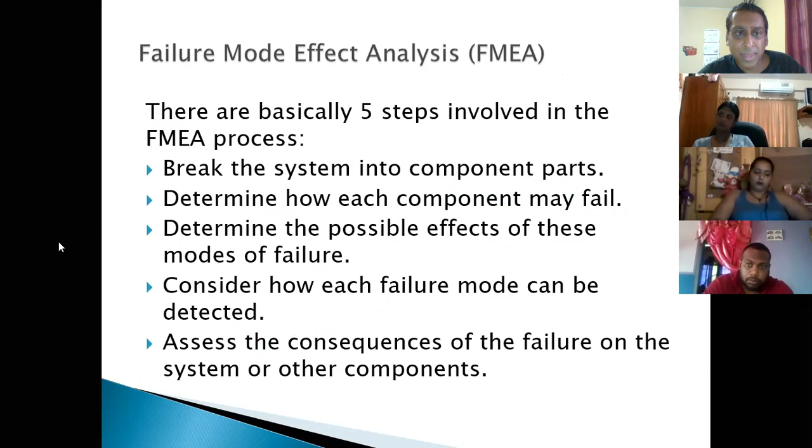But I don't want to do this one, especially with the rain, right? So if the rain is up, I'll come back. I'll try to kind of keep on because we have to read each piece in this, which would be a bit problematic. Once you get the idea, you can move from there, right?

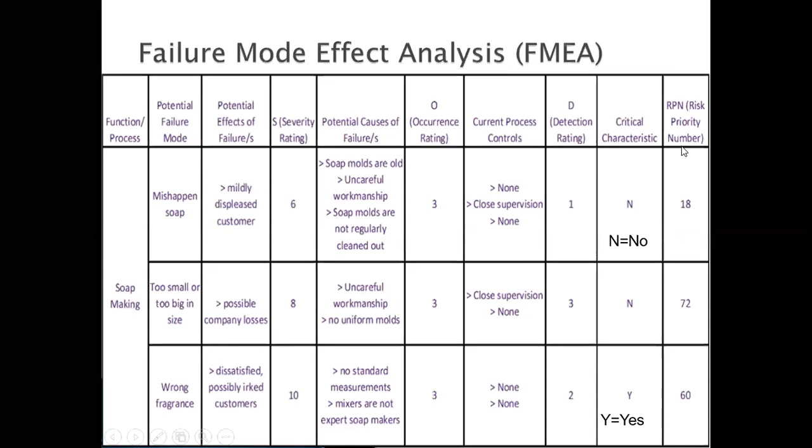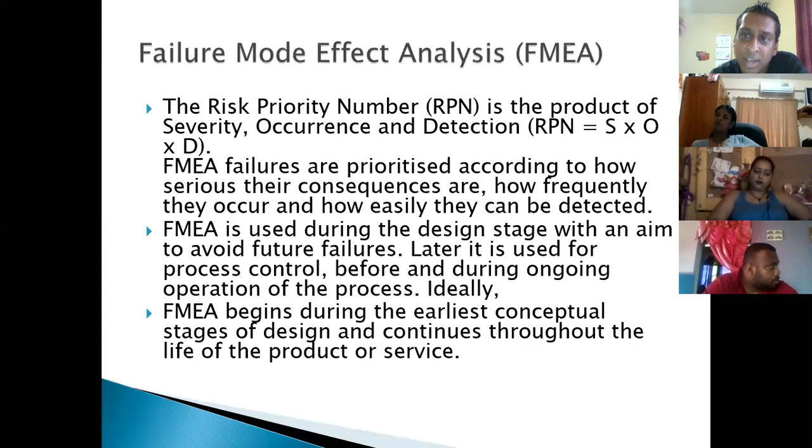So again, because it's multiple choice, we could say that a question can be, which of the techniques uses a risk priority number? Which technique uses a study of components? The answer would be a failure mode effect analysis, right? This one is the easiest one.

I mean, that's a lot of words, right? Typically what they're saying, a what if analysis is a HAZOP. A what if analysis is a failure mode effect analysis, right? A what if analysis, if you go back and you see the words design, deviation, modification, all of those are covered in a HAZOP already. So a what if analysis is done in a HAZOP.

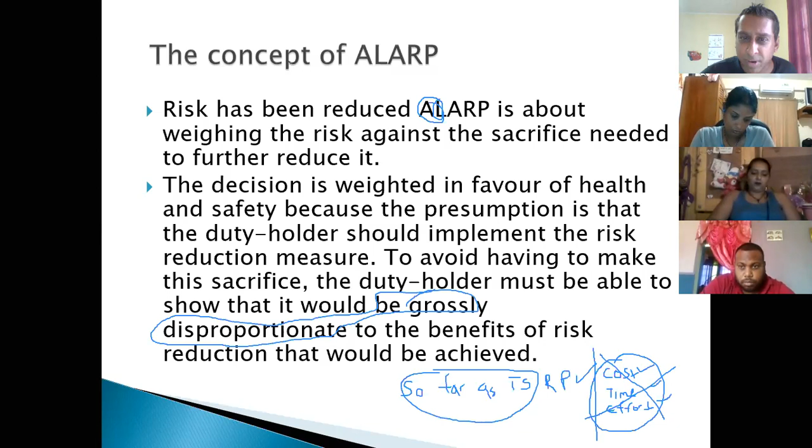So the only excuse you can say is something like this: if something is being asked for, but what is being asked for, like the example I tried to create here, is to spend $1 million to buy something to prevent people from suffering bruised knees, that may be seen to be grossly disproportionate to control the risk.

That's the only excuse they have there. So how do we bring this down for exam purposes? The thing is, exams tend to be less complicated than what I've tried to do here.

There was an exam question that said: what must the employer consider in assessing risk to as low as is reasonably practicable? And the only answer that made sense, well, all the answers had one of these.

All the answers had cost, time, and effort, or cost, task, and effort, or consumer, time and effort. So the only one that made sense was cost, time, and effort.

We can't use it as an excuse, but the money has to be spent. The time has to be spent. The effort has to be made to reduce the risk, unless it is grossly disproportionate.

As I'd say again, the exam question was less complicated. Again, because it's multiple choice, it simply asks what must be considered. And the only thing - they had the three words, but it was all messed up.

They had consumer, they had task, they had different words starting with C and T and E. So the only one that made sense there was cost, time, and effort.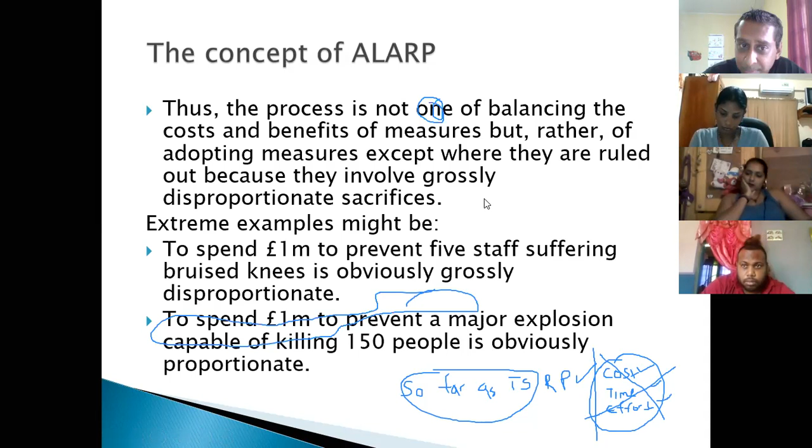The answer: it must be beyond the money there, like typical money. And if you wondered why I went to talk about standards, it was like beyond a standard, beyond what would have normally been produced, or beyond an industry norm.

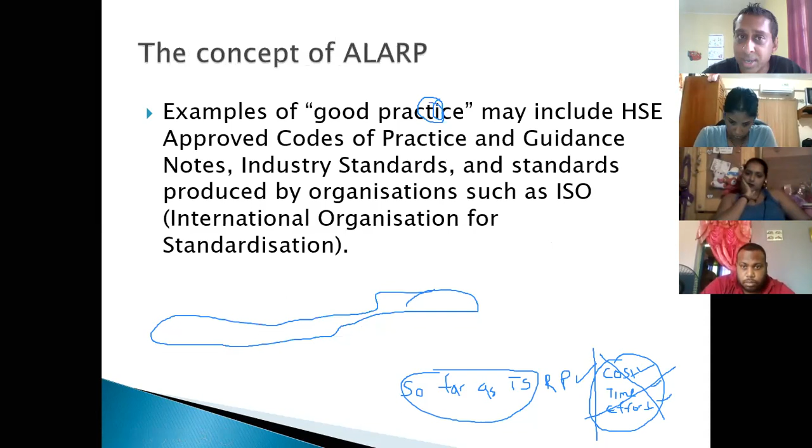This is the point of putting all of these slides here. And if you look at it graphically, we're almost finished. There's one more thing to go, which is the hierarchy of controls. I'll let you all know that already. Let me just try to clean that slide there.

So if you look at it graphically, what they say about ALARP is that it is economical. It is reasonable, then it's not going to break the employer's pocket. ALARP did not require the employer to reduce the risk to zero.

That may not have been practical, plus it may have been expensive. This is the point of the graph. But it did require the employer to justifiably reduce the risk to as low as is reasonably practicable - spending money, looking at cost of security, spending time, making the effort.

It is still seen to be reasonable, unless what is being asked for is a lot of money, like £1 million, and that is just going to prevent minor car park accidents on your premises anyway.

So that may seem to be an exception where the employer can say that they would not provide this because it's too much money to prevent these minor car park incidents anyway.

All right, so last one - a lot of you all would be familiar with the control hierarchy. There's about 3 slides with it, so I wouldn't even read because the rain has stopped.

I would just tell you one, two, in fact. So the point about the control hierarchy, a lot of you all know, is that it starts with elimination and ends with PPE.

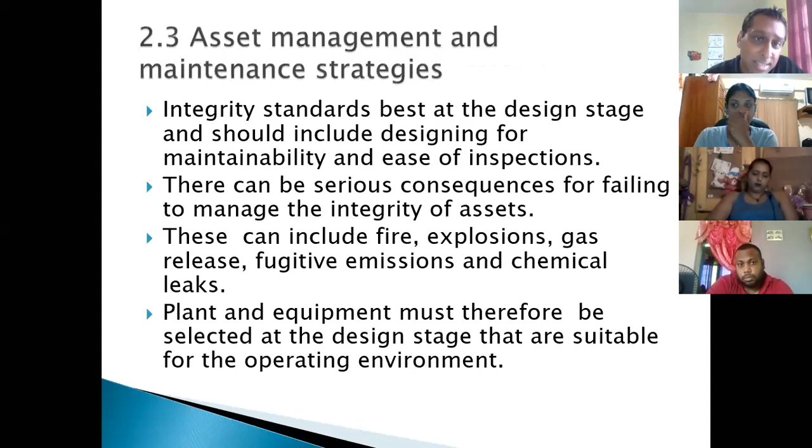So this is the idea that in the field of process safety, we would use tools and equipment that have been designed safer. So if you ever see this as an option, and if there was a question, I wonder if it's here. It is here, it's just where it is, right? If I didn't pass it already.

There is a question on your paper that asked what is the best strategy, and the answer they gave was inherent safe design. That is the better answer because it is not you putting measures in place, but the manufacturers, the designers of this thing, who would have put those control measures in place. Nonetheless, I'm going to read out the first word in the hierarchy - inherent safe design, by the way, is your answer for any hierarchy question.

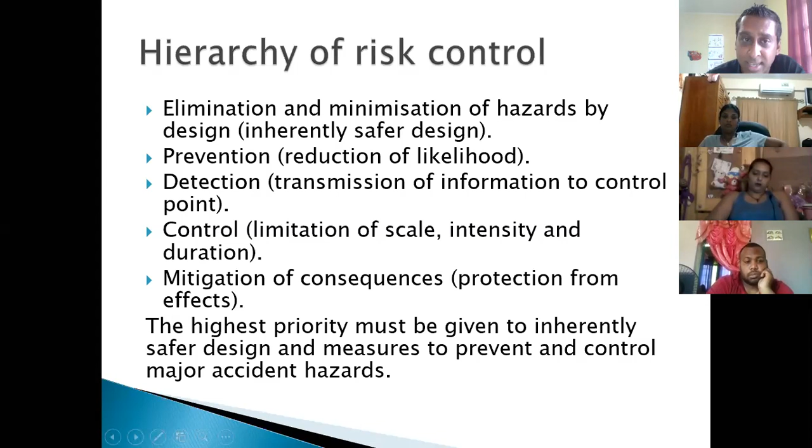Prevention, detection, control, mitigation - the highest priority must be given to inherent safe design and measures to prevent and control major accident hazards. Inherent safety is a concept particularly used in the chemical and process industries. An inherently safe process has a low level of danger even if things go wrong. It is used in contrast to safe systems where a high degree of hazard is controlled by protective systems. This thing is intrinsically safe, spark resistant.

Again, some of those things are diploma type work, so I don't want to go into it, but know that you have different types of equipment out there, type E and type C and whatever have you, that these things are produced to be safer anyway. An inherently safer design is one that avoids hazards instead of controlling them, particularly by reducing the amount of hazardous materials and the number of hazardous operations in a plant.

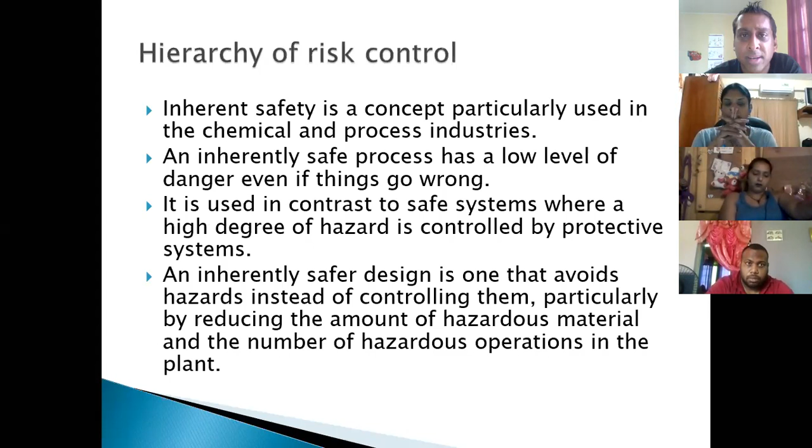So I'll stop there for today. We're going to stop right here on asset management, well, asset integrity life cycle anyway.

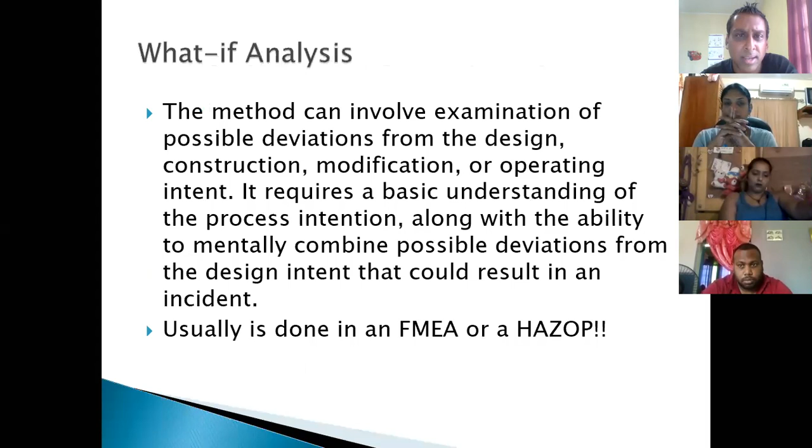I want to go back. I think there was that question here, and I think it was right there. No, you have to look through, I guess. It is there, I don't know if I passed it when I was going through, but that question is there - which of the following techniques is the best? And the answer was inherent safety design.

You know what, as we have our books and we have about 5 minutes, just in case you forgot, let me find the page for you at the end of your chapter. There are questions at the end of the chapter. This looks like page 54 or 55. I'm sure I'll be able to find it there faster than trying to go up and down with the slides. 54, yeah, 54, right? Okay, thanks very much.

You can look at some of these at home. We have looked at some in class. Let's just do 1, 2, and 3 because of the time, and I really wanted to still address some issues anyway. So number 1, see if you're coming up with the answers, right? By the way, the answer is somewhere in your book. I think it's on the other page, but don't look at the other page just yet.